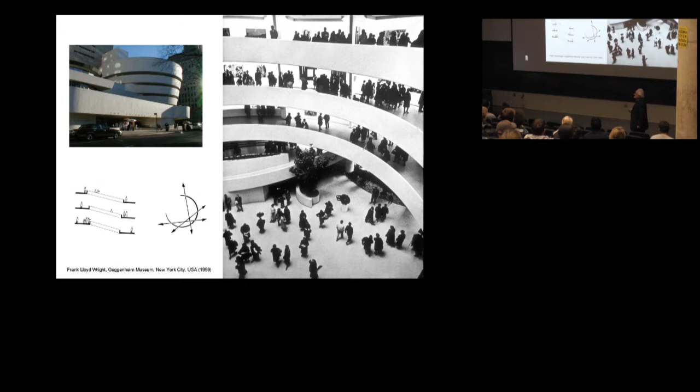But this is conscious or unconscious, what Frank Lloyd Wright did in this building—the feeling, I mean. It's an extremely interesting building. When you see it from the outside, it's also quite modern in a nonsensical way—it's completely a shape. It could have been made here by students in the workshop. But I forgive him, as I forgive everybody who makes beautiful shapes, as long as the interior space keeps people together. This is what my lecture is about.

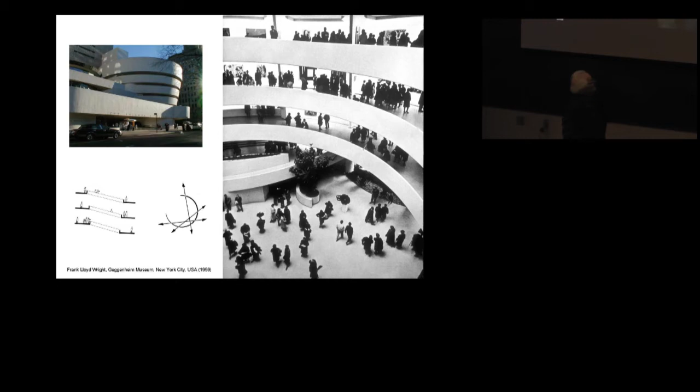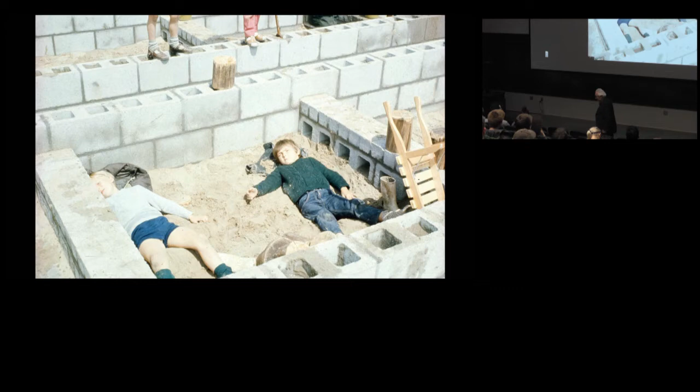This is the sand pit I made in one of my schools. Actually, it's the same thing in a different scale. It's a sort of small box where people feel protected and embraced by the space. What the architect did was just some stupid walls—cheap material, nothing special, no exciting thing.

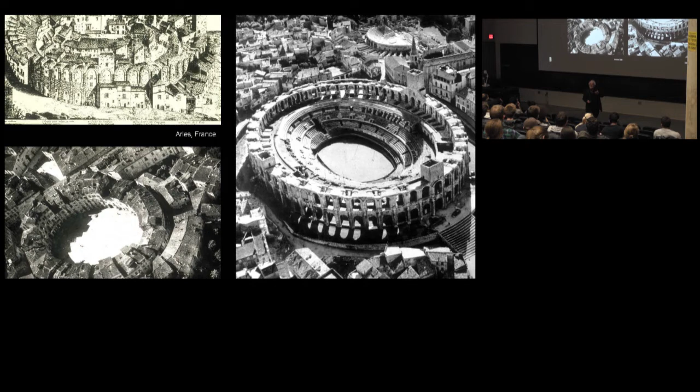My main example is always the arenas, which were made by the Romans. You find them everywhere the Romans have been, and all of a sudden I realized that the same arena, like this one in Arles...

...at different times was used in a completely different way. This arena was used as a form to keep a small city protected from the barbarians. And this same form here was making a piazza in the city.

This is a remarkable thing. This is about structuralism. Structuralism, basically in architecture, is based on the fact that there are forms that, although remaining themselves, can be used for completely different things.

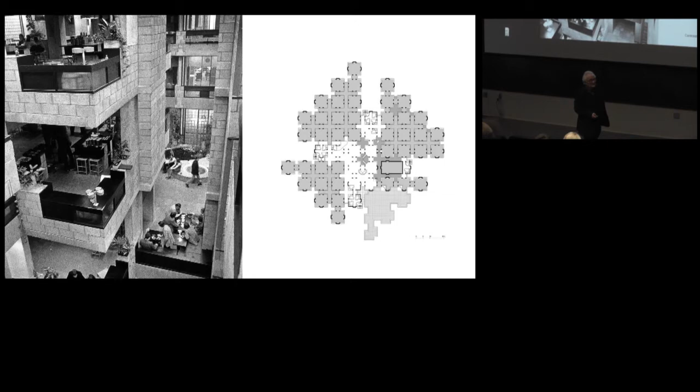What I did was just cross the building by streets, based on this gridiron idea. And the building was just chopped up into space units.

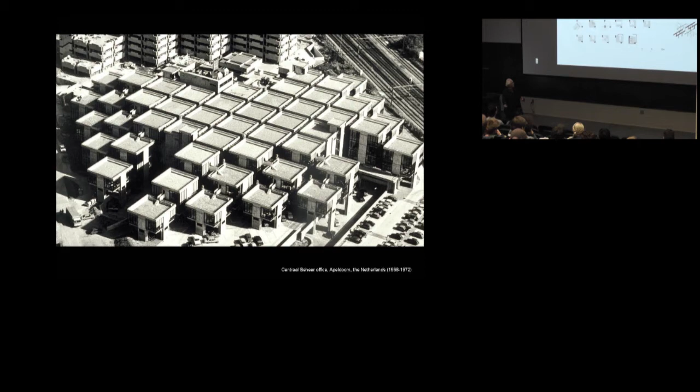This is about polyvalence, which you mentioned in your introduction. The idea has been to make space units which can be used in different ways. It's a little different from the idea of multi-purpose, because multi-purpose means saying beforehand something is, let's say, a music hall and also a theater—you make it for two different things. The idea of polyvalence is that people have the possibility, are incited so to say, to interpret the space in their own way.

And here I use this same space unit in different ways. So this was not a functional building in the sense of making a specific shape for the staircases, a specific shape for the staff offices, a specific space for this, a specific space for that. I tried to get rid of the whole idea of specifying things and come to a sort of universal space unit which can be used in many ways.

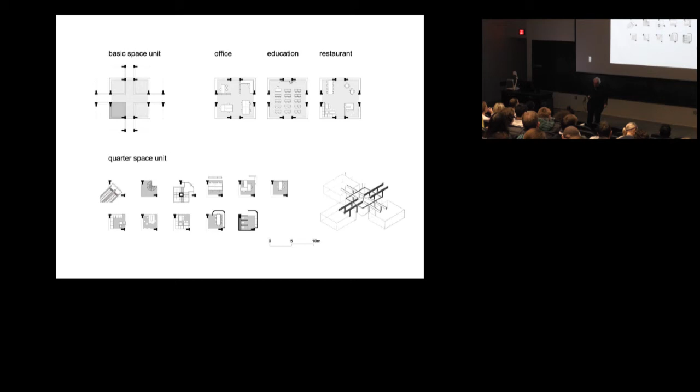Here it is an office building, and now it's abandoned because this office wanted to make a larger building, wanted to inhabit a larger building. In the meantime, they dismissed all these people so they could have stayed in this building, but that's the economic crisis. Now they think about making it into a school. And this is the condition of today, that buildings will not remain what they were made for.

This is a school of architecture, and it seems to work quite well at this moment. But there might be—I don't want to be pessimistic—but there might be a condition that you don't need architects anymore, and then you have this building. You can do two things: you can tear it down, a lot of concrete, very expensive, and a pity because it's a very nice building.

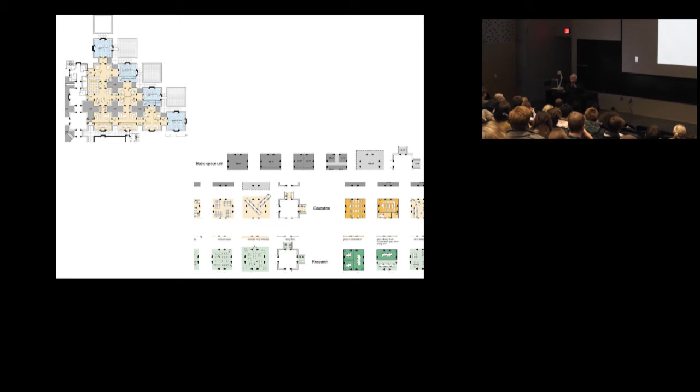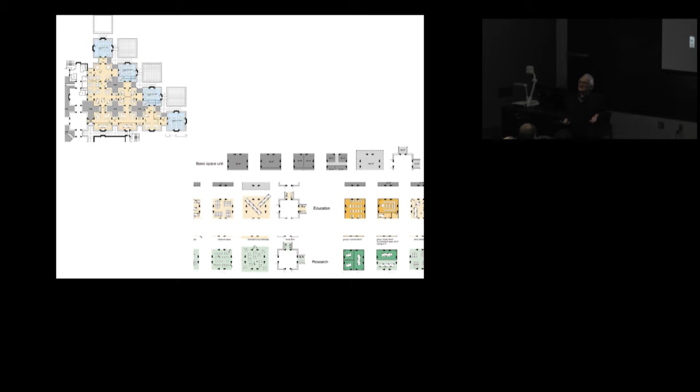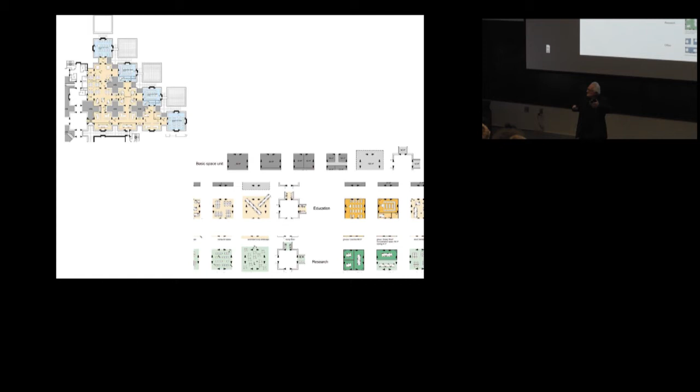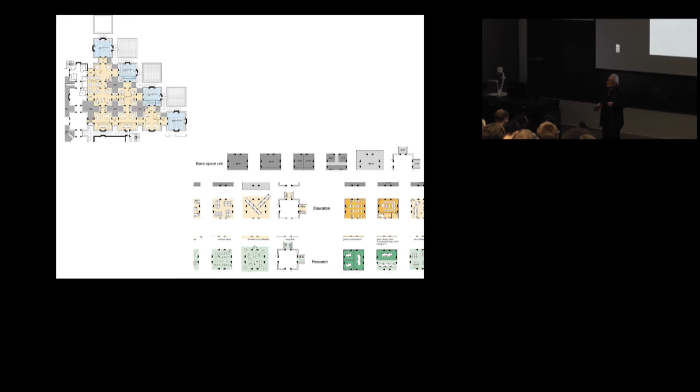But what I want to promote is the idea that our buildings have a sort of universal quality, that they can also be used for, well, let's say we need another hospital—can you also put a hospital in this building? For me, that is the sort of criteria, and I have the feeling that today buildings are shaped too specifically for one type of program. We have to step back to the idea of making buildings that just could become what society asks for at a certain moment, not exaggerating too much the specificity of the thing.

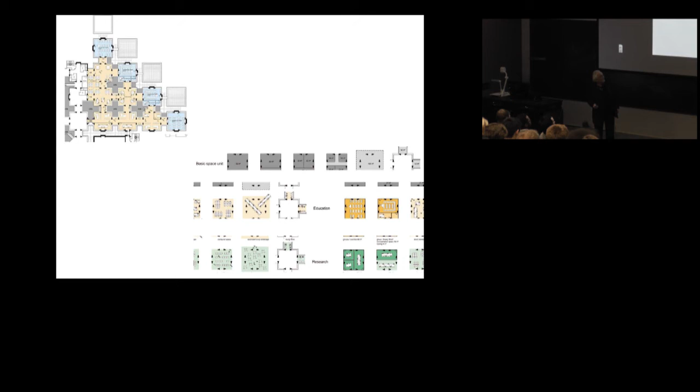This is the building we just finished. And this is, of course, a drawing.

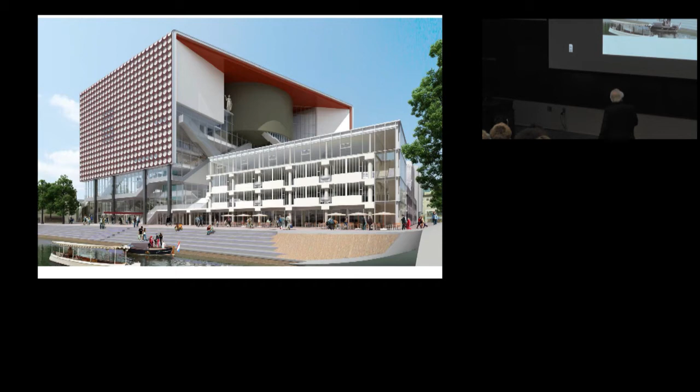Actually, this used to be... well, you see, it's finished, and this drawing was not quite bad. It's really realized almost the same way, which I think is amazing. Anyway, this is what it used to be.

A building just for classical music as part of a shopping center, believe me or not. But what was it? What it used to be? A fantastic concert hall with very good acoustics. There was a very good acoustician - it was not the architect completely to do it.

It is actually one of the very few halls that are completely in the round. If you like, it is a little bit based on the Philharmonic of Berlin, but this is more radical, and it worked quite well.

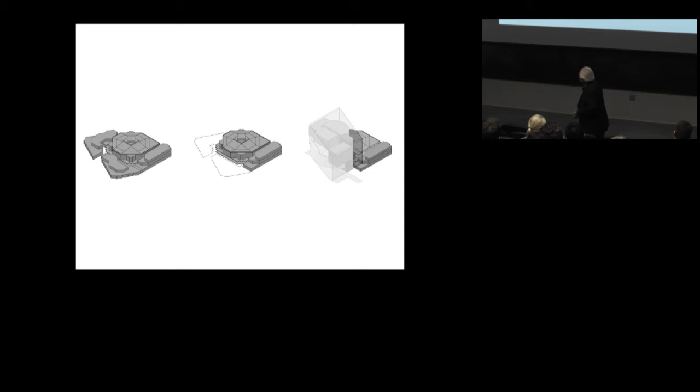But there was a lot of political turmoil, and this is what it was. At the end, they decided to keep the old hall and this part and tear down this part. And they extended it with...

Building, you knew why you made that building in the way you made it. And then they come and they tear down parts and they add parts.

The idea was that except for the symphony hall that remained, they wanted the chamber music hall. So far so good. They wanted the jazz hall, okay, and they wanted the pop hall and a crossover hall. And they asked me to supervise. Well, that was not so easy as I tell it now, the whole story, but they asked me to supervise, but all these different people had different architects.

The jazz hall had a jazz architect. The pop hall had a pop architect. And they asked me to make a chamber music hall, and they were all old architects. And I proposed to have a young architect to make the crossover hall.

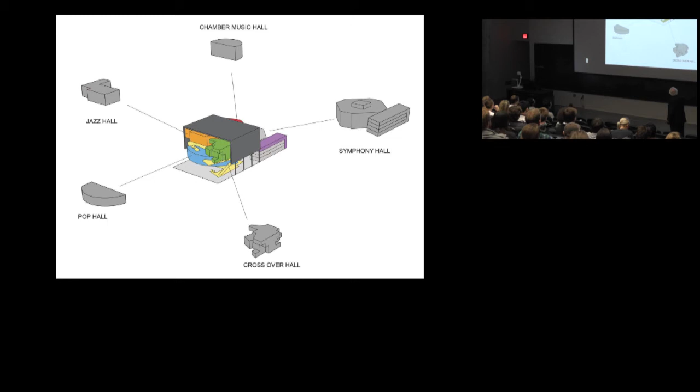And what we did, we added this sort of - what you call - tent over it, like what trucks have. You know, trucks have that sort of, I don't know the word in your language, but to keep it all together. To keep the whole thing together.

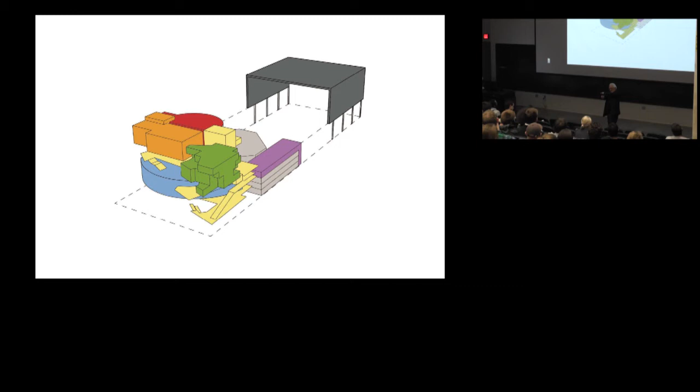So this is the collage of things, different architects talking their own language, completely different languages in form, in color, in everything. And I proposed to make this sort of thing and put it on top of it to keep it all together. So that is actually the condition of the urbanism.

And you see, this made sort of building where the old building was trying to hide more or less under it. Wanting, can I also be part of it, you know?

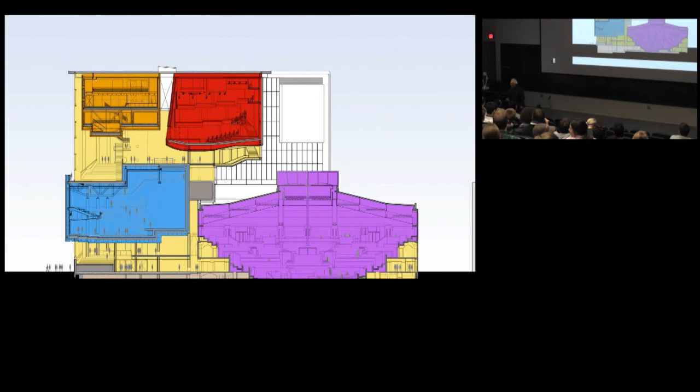Yes, we tried. And the chamber music hall, the jazz hall, the pop hall, and then in front of it you have the other hall. And what we tried to do was making just spaces in between that were sort of connecting spaces, like streets and places in a city. I wished I could introduce a gridiron, but this is impossible in this situation.

And the old hall was preserved and renewed. And people, I thought, well, it's a little bit old-fashioned when you see all these new things. People came in, look at this. In some way they didn't realize that it had a quality of the other.

This is the new chamber music hall we built. It's not yet tested. I'm still not sleeping about what the acoustical result will be. We'll hear that in a couple of weeks when we have the first try-out concert in it.

It's sort of based on the vertical, the idea of the old Italian theater, you know, when you have all these galleries over each other. And you see in between there is this idea of being in an airport, you know, big airport atmosphere, with escalators and well, it's just like in the city.

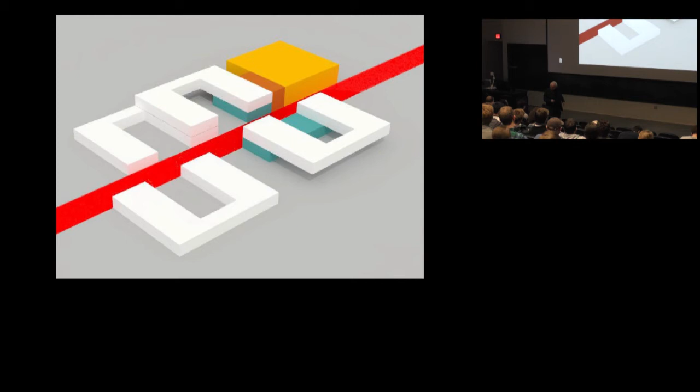So you see these elements. Actually they are big space elements, grouped to a street. And you have this idea, you can pile them up, you can extend this building, because every building you make today should also be extendable.

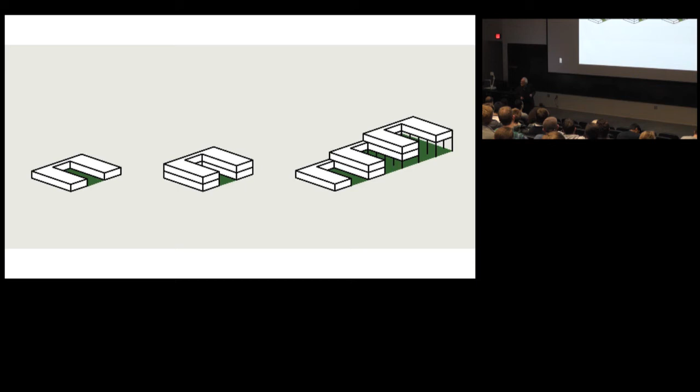I forgot to say this afternoon in the studio, but all these buildings made just as a complete piece of sculpture will, in some years' time, fail. Buildings are not just autonomous pieces of sculpture that stay the way they are conceived. They will not only be used for other purposes, but they will also extend or shrink. They are in time, they are just going to be transformed.

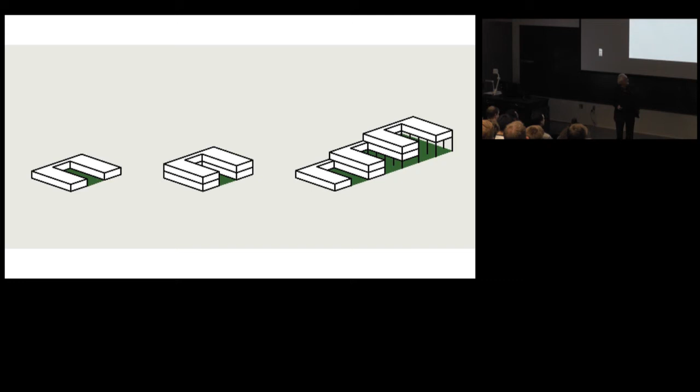My idea is always to try to make a sort of structural basis, call it a structure, the idea of tectonics, to have a sort of simple, universal, as much as possible, objective basis, which can be interpreted in different ways. So this is the structural basis.

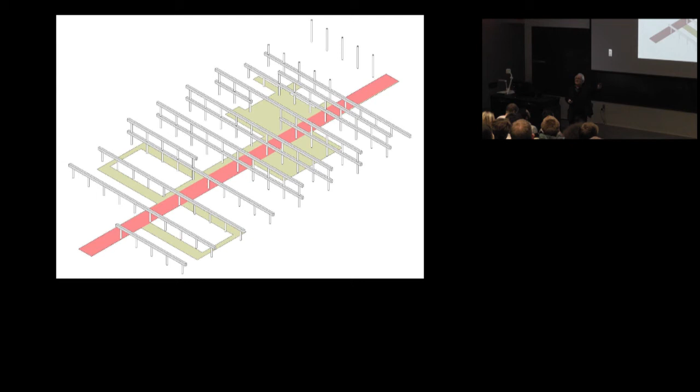And so that for me is very important. There's a very simple system of beams, because it has to be cheap. In America, everybody is rich, so you have enough money to do what you want. But in Europe, especially in Italy, they don't have much money, and you have to build in a very elementary way.

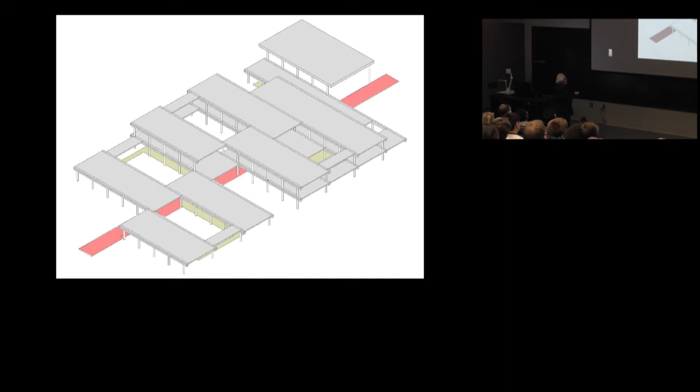And simple flooring over it, and what we leave is these open spaces, which were a theme like the old Roman houses. So here you have the central street where everything is coming together. It's a sort of comprehensive.

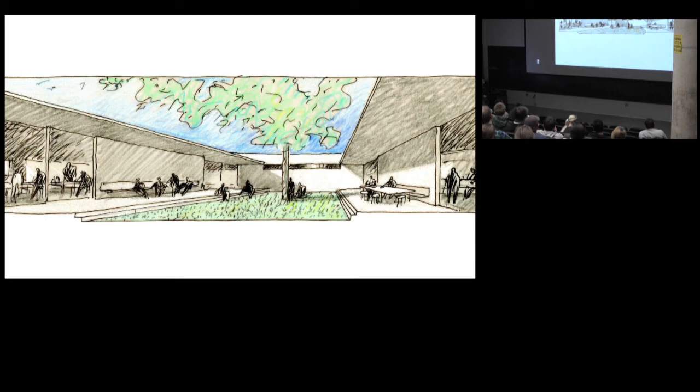I must say this building is a beautiful building. I'm sure when you are working in it, you know your way, you know where the bathrooms are, and you can find everything. But it is not quite comprehensive in the sense that for me the ideal building is something like, well, not the only possibility, but a main street where everything is connected, where you find each other, and where everything happens. And this is the idea of the inner courts. I sold them by saying that they're based on the idea of the old Roman house, and that works, and they really work in that way.

We made that place in the shadow where the children work outside, which in the Roman climate is quite nice. And here you see the outside space is very important. This is not the inner court, but that's the outskirts. I'll explain later. The thing doesn't work quite well.

And on the inside, there is always the main piazza where everything comes together. And here you see the outside space. The building is sunken. I mean, when you have the Parthenon, it's put on a sort of base, and you have to climb to get to the building. Here, I did the opposite. I put the building in a pit. It does work.

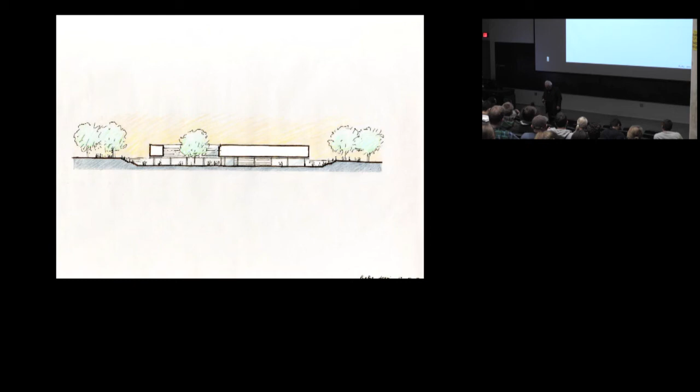We made stairs all around, and this is the result: people are sitting, and you have this space as a containing space, so to say. This is a theme I have in many of my buildings.

This is a school, a very old school in Amsterdam, where in the center there were these steps, and I discovered what the possibilities of the steps are. They are actually tables to work on, and they are a place where people see each other. You get the sense that the modern school is not just classrooms where one person is telling you how things are, but where people are looking for the truth in their own way with their own computers. The school should be more a place where you have many possibilities to sit, to have some protection and some view, and where you can work yourself.